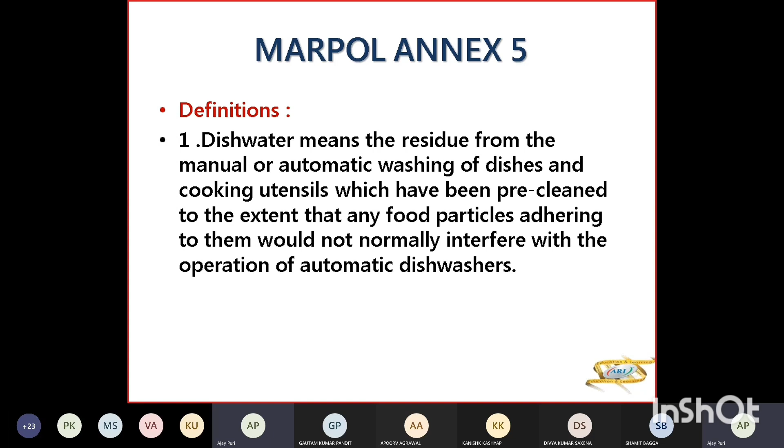Grey water. Grey water is basically drainage from dishwasher, shower, laundry, bath, wash basin. But toilet, urinal, hospital, animal spaces का black water है, which is sewage. So that is not considered in grey water. So grey water is not considered garbage in the context of Annex 5.

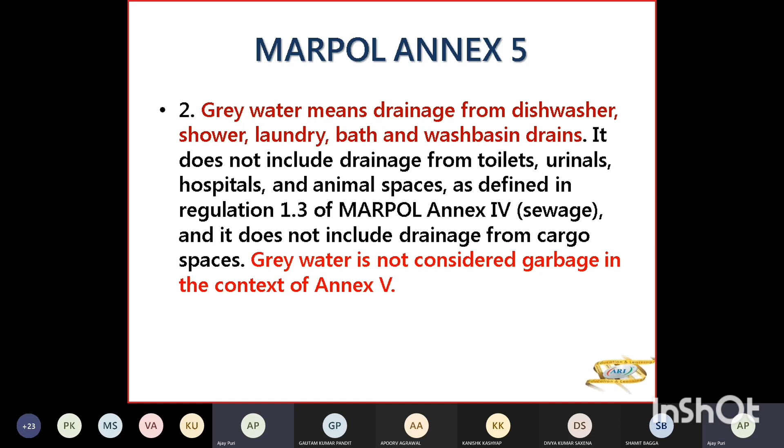Recycling means activity of segregating and recovering components and material for reprocessing. Reuse means activity of recovering components and materials for further use without reprocessing.

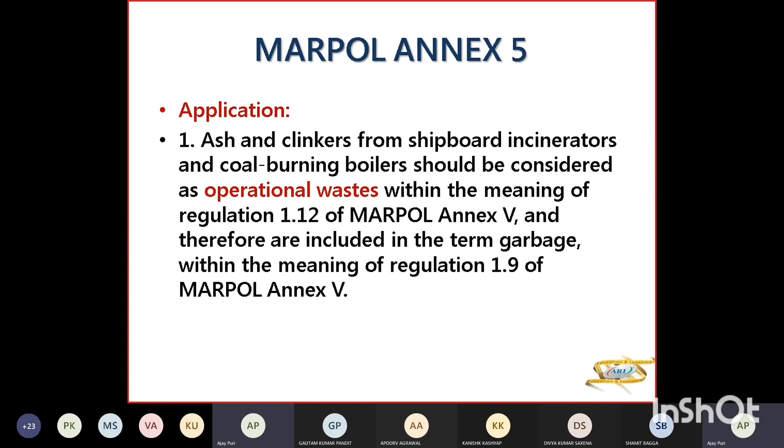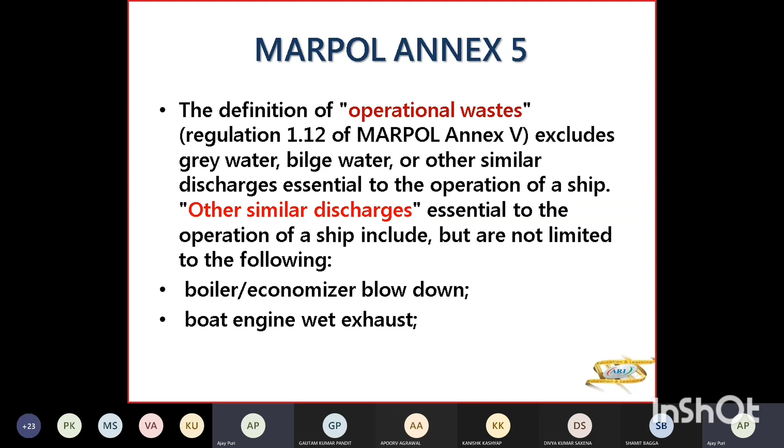Now, definition of operational waste will not include grey water, bilge water, or similar discharges. Other similar discharges जो definitions में आते हैं, they will be boiler, economizer blow down, boat engine wet exhaust, chain locker effluent, chain locker का जो discharge है, when you have controllable pitch propeller and thruster, so the hydraulic fluid and other oil to sea interfaces, that is also other similar discharges.

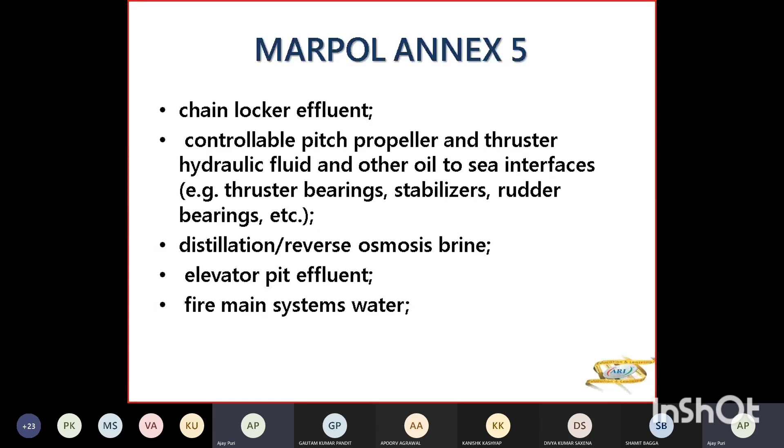Then your distillation, reverse osmosis brine. Brine is salt water. That is also considered as other similar discharges. Elevator pit effluent. जो elevators हैं जो आपके RoRo vessels में, तो उसके नीचे जो जगह है उसमें जो पानी इकट्ठा हो गया, so that is effluent. Fire main systems water. That is other similar discharges.

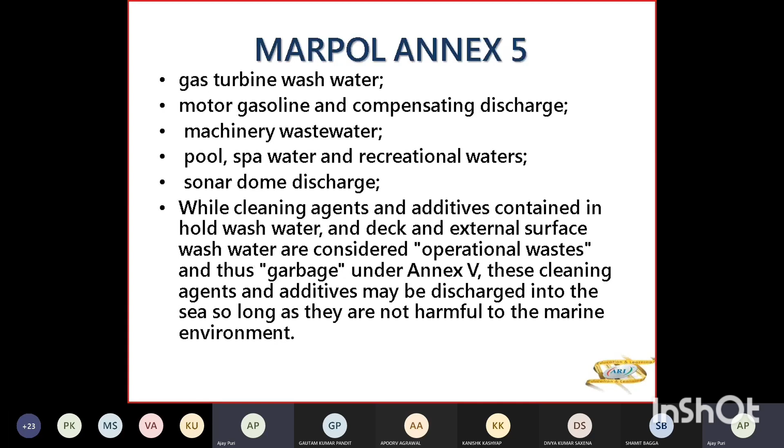Now, Port State Control is going to come on board for checking if you are complying with your MARPOL, ISM, ISPS, MSC, with your SOLAS, STCW, MLC. All these requirements will be checked. उसको check करेगी आपकी Port State Control. So every MARPOL regulation will be checked by the PSC. You have to adhere to it.

So here, Port State Control officers can inspect a foreign flag ship at the port or offshore terminal where there is a clear ground. Clear ground का मतलब है when you are not complying with your code, so they have a clear ground for detailed inspection. For example,

Port State Control का इंस्पेक्टर जहाज पे आया और he is taking a round. Now on the round he has seen that fire control plan box लिखा हुआ है. Now he opens the box of the fire control plan और उसमें plan ही नहीं है. So he'll give you clear grounds for detailed inspection, then they'll inspect all the other things and hold the ship till you are correcting.

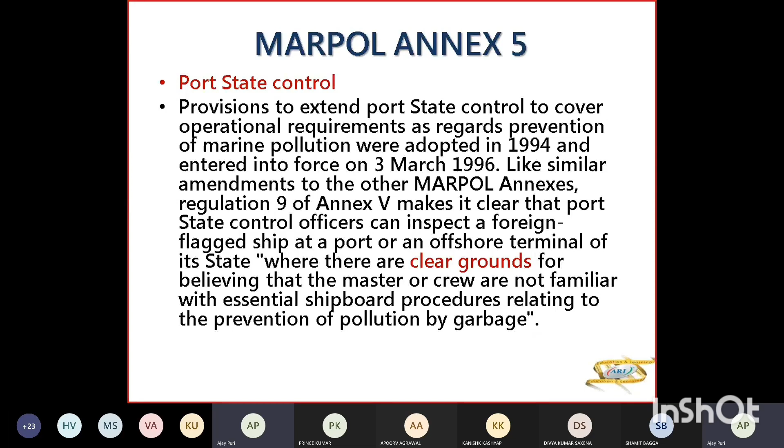Placard. So they require a placard for every ship of 12 meters and over in length, and fixed or floating platforms. They are supposed to display placards notifying your passengers कि यहाँ आप वेस्ट डाल सकते हैं, इस बिन में वो वाला डिस्चार्ज कर सकते हैं.

So that will be mentioned in the placard. So the placard should be written in working language of ship's crew and also in English, French and Spanish, so that your passengers can understand.

Now, garbage management plan, बहुत बार question आ चुका है, what is garbage management plan? So it is required for ships of 100 gross tonnage and above. Every ship certified to carry 15 persons or more, and for ships of 100 gross tonnage and above, and for every fixed and floating platform, they are supposed to

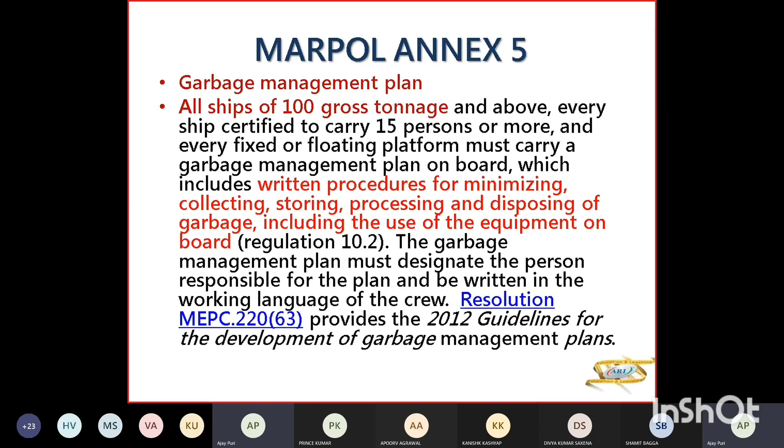have garbage management plan. So in your plan, you will have written procedures, how to minimize garbage on board, how to collect garbage, how to store garbage, how to process it, how to dispose garbage, including how to use the equipment for garbage collection. So इसमें एक designated person will be responsible for the garbage management plan and it should be written in working language of the crew. So MEPC resolution will provide the guidelines for development of garbage management plan.

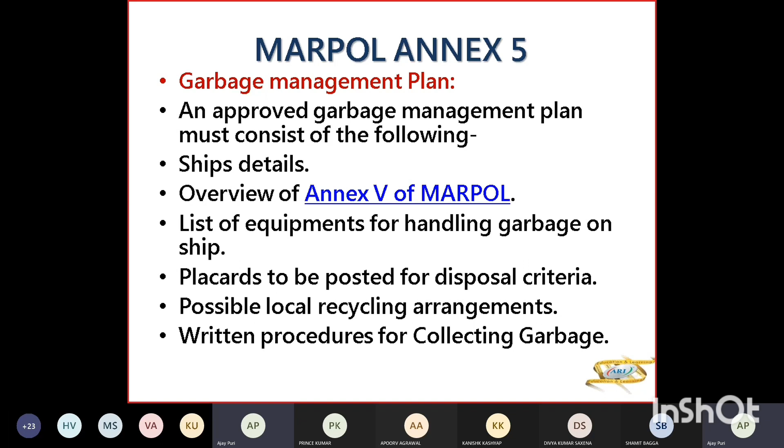So what will be a garbage management plan? It's approved, that is, a flag state approves the garbage management plan, जिसमें ship के detail आएंगे. Overview of Annex 5, so the discharge criteria of Annex 5 will come. List of equipment for handling garbage on ship, which are the placards to be posted for disposal criteria. What kind of possible local recycling arrangements are there on board? What are the written procedures for collecting garbage? How do you segregate garbage?

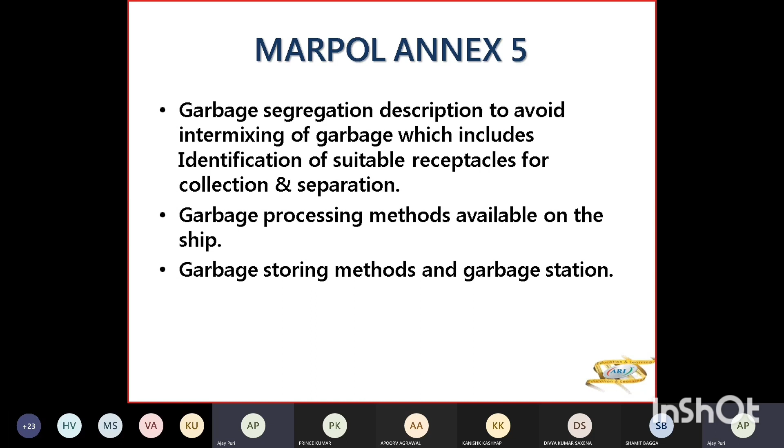What are the processing methods available on board? What are the storing methods there? Where is the garbage station? All will be given in your garbage management plan. What are the disposal methods there? What will be the entry made in garbage record book? What are the emergency and accidental discharge criteria? What are the needs for reception facility? Identify the available operating and maintenance procedures for collection equipments on board.

What is the training and educational program so that you know how to segregate garbage, how to process garbage, how to make entry in the garbage record book. Then you locate your garbage collection points, कि किस डेक में कौन सा पॉइंट है.

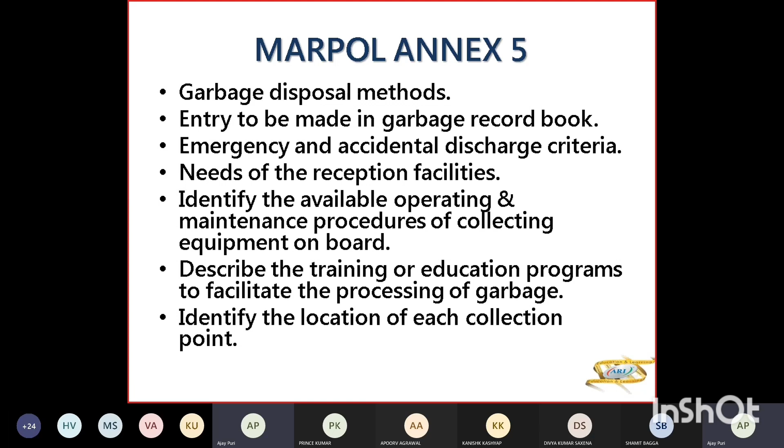So garbage management plan mandatory है for ships of 100 gross tonnage and above, and on ships which are certified to carry 15 persons. Suppose छोटा जहाज है और इसमें 15 से ज़्यादा लोग हैं, then also you'll require GMP. So it is written in the working language of crew, and this has to be retained on board as record for 2 years from the date of last entry. So a responsible officer should be in charge of maintaining garbage management plan. Normally chief officer is responsible along with second engineer.

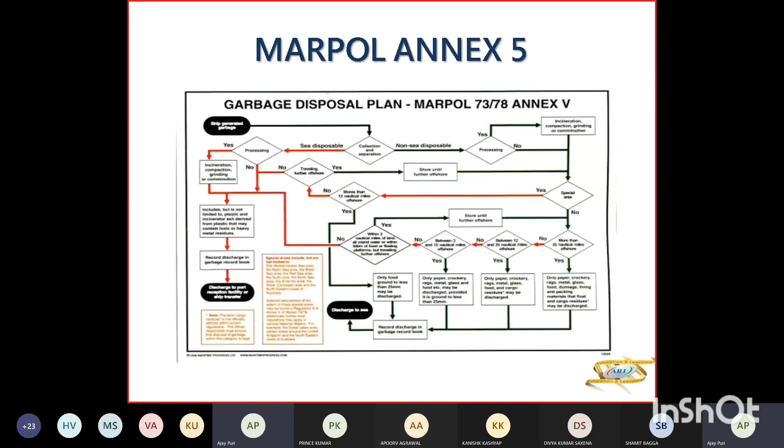So यहाँ disposal plan है, चलो ये वाला करते हैं. Now this is your ship. ये garbage management plan में ये flow chart बनाना पड़ेगा. So this is ship generated garbage. You are collecting and separating it. This is sea disposable garbage which you can dispose of as per your discharge criteria. And this is non-disposal, जिसको shore को देना. So sea disposable garbage को process करना है कि नहीं करना? No processing. अगर वो food product है तो you have to pass it through grinder and comminutor. And then you are authorized to discharge at sea or not.

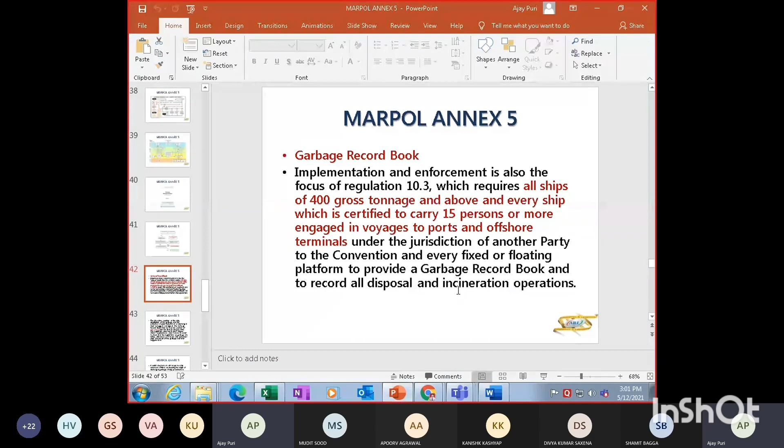So here you have to, आपका garbage management plan was 100 के ऊपर, 100 gross tonnage and above, but garbage record book is 400 gross tonnage and above, and every ship certified to carry 15 persons or more in voyages to port and offshore terminals. GMP was also for 15 persons and more.

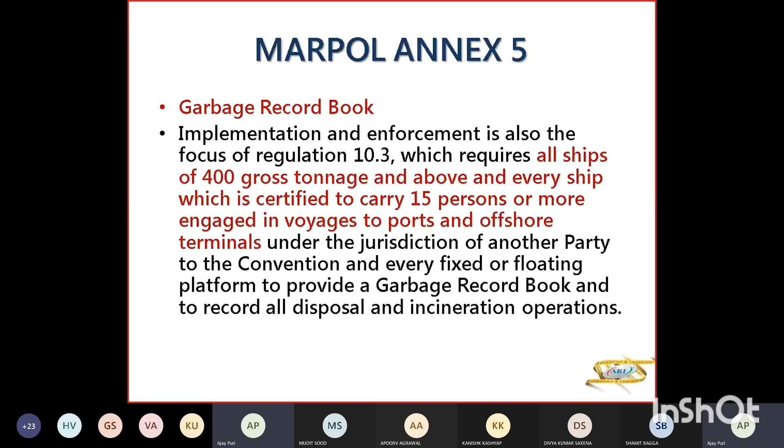So the date, time, position of the ship, description of garbage and estimated amount incinerated or discharged must be logged and signed. The garbage record book must be kept for a period of 2 years after the date of last entry. So it should be kept for 2 years after the date of last entry.

And this regulation does not itself impose stricter requirements, but it makes it easier to check the regulations on garbage are being adhered to, as it means ship's personnel must keep track of the garbage and वो कहाँ गया है. Because PSC आपको पूछ सकता है कि कहाँ garbage गया और आपने रिकॉर्ड नहीं किया, then he can give clear grounds and detailed inspection हो जाएगा.

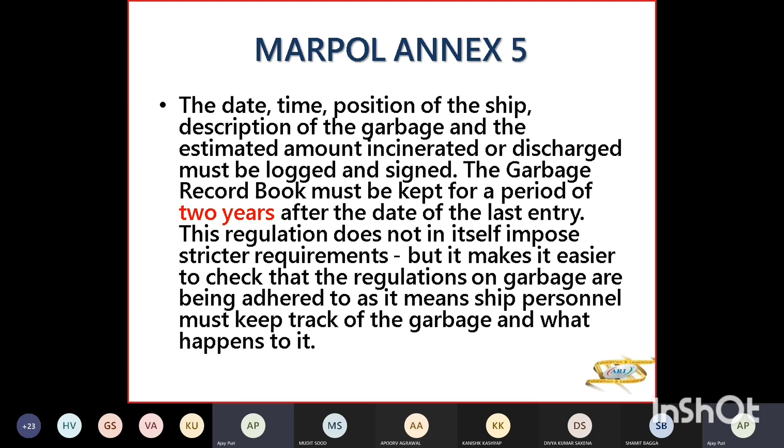So it can also prove an advantage to the ship because your local officials are checking the origin of discharged garbage. And when you made your record, then you have a proof. Otherwise, you will be wrongly penalized for it.

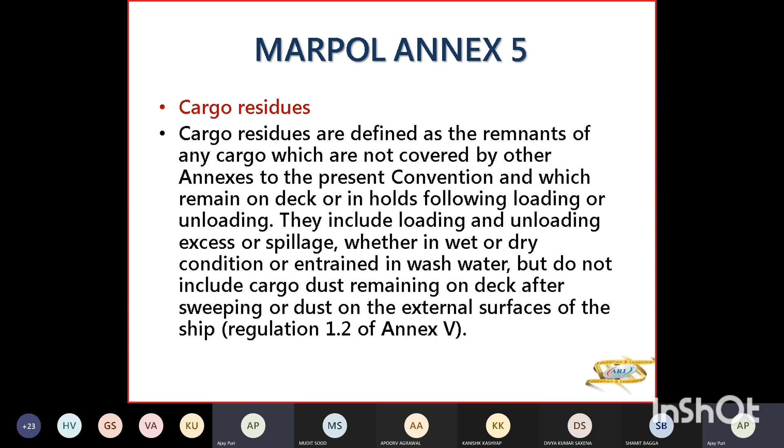So cargo residues will be classified as HME or harmful to marine environment, which must not be discharged to sea. So they have to be given to the shore reception facility. So the Annex establishes different requirements depending on whether they are contained in wash water or not. So solid bulk cargoes must be classified and declared by the shipper as to whether or not they are harmful to the marine environment, and the criteria as per Appendix 1 of MARPOL Annex 5.

अब आता है शिप बोर्ड में जो जलाने के लिए इंसिनरेटर है, that will cover the design, manufacture, performance, operation, testing of this when you want to burn the garbage and shipboard waste.

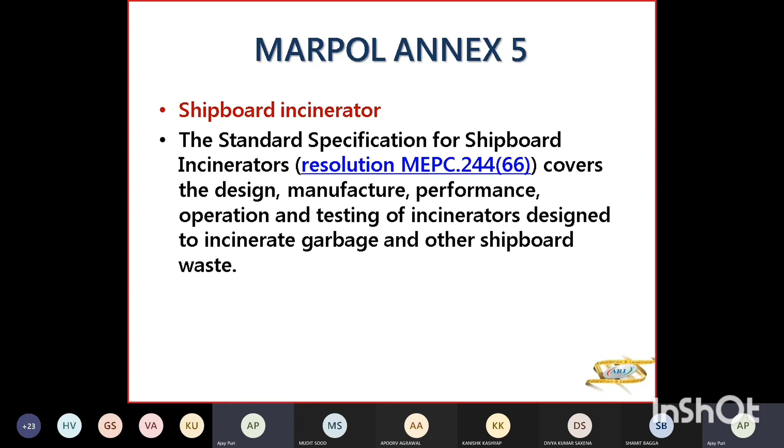And then you have chapter 2 of MARPOL Annex 5 where you have verification of compliance. So in the verification of compliance, your IMO member states will audit your ship and see whether you are going as per the requirements of Annex 5. So mandatory IMSAS, that is IMO member state audit scheme में, IMO members will appoint some of the IMO country guys to inspect your ship when you are in that country.

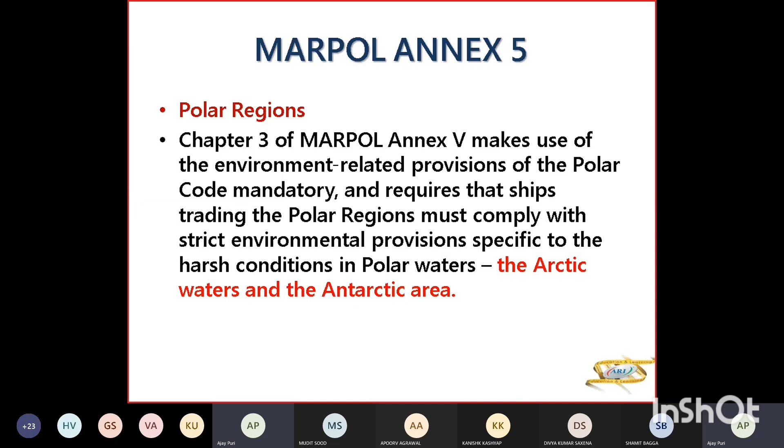Now in the polar regions, they have to comply with strict environmental provisions for harsh conditions of polar waters, that is Arctic and Antarctic. So you will have the requirements where you cannot dump waste.

तो अभी आपको जरा ये दिखा के then I'll show you a video. Garbage management plan देखें, and then we'll do. I'll show you a video.

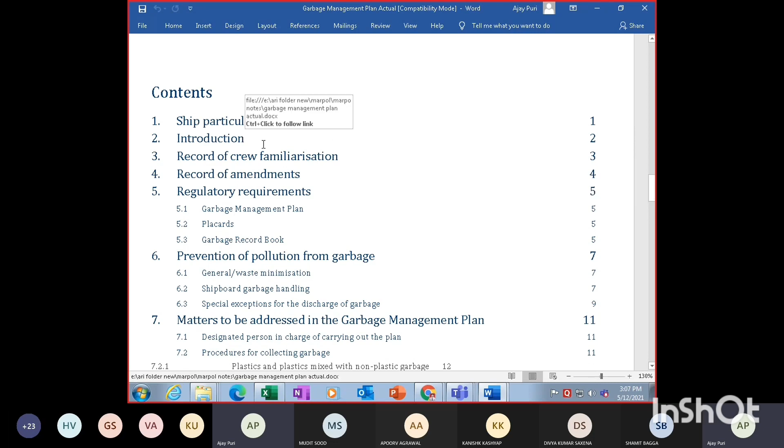Now you have the ship's particulars, the introduction, these contents of the garbage management plan. Many times they ask what are the contents of the garbage management plan. So in it: ship's particulars, introduction, record of crew familiarization with the procedures, record of amendments, regulatory requirements, which is your garbage management plan, placards and garbage record books, prevention of pollution from garbage, which is minimization of waste generation.

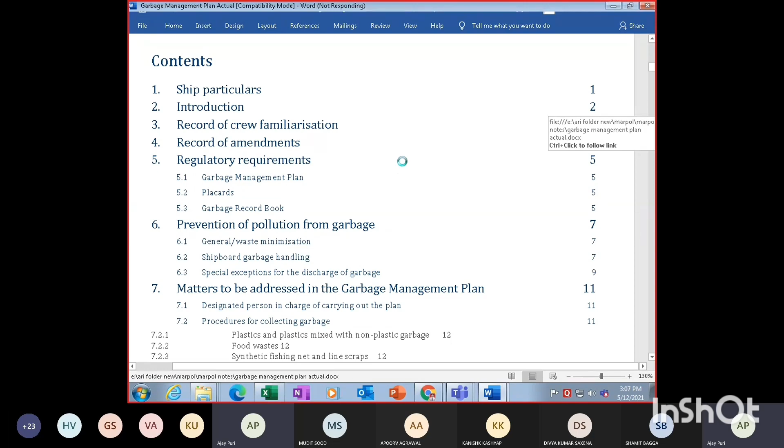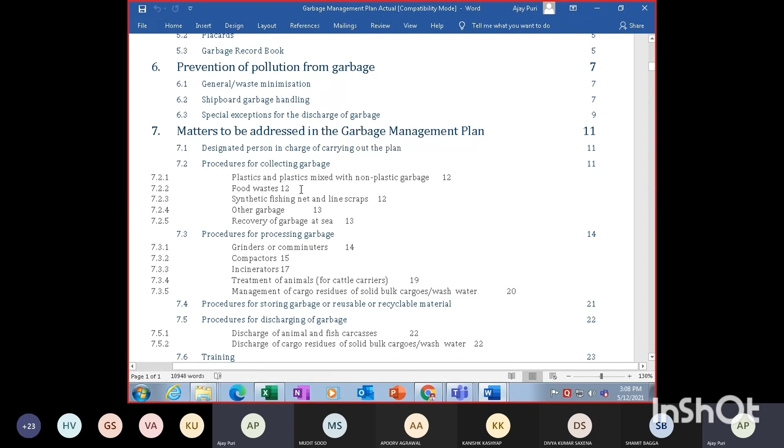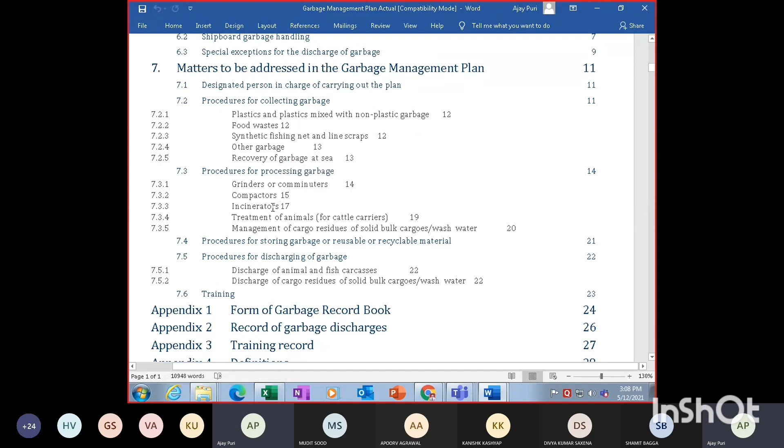Then your shipboard garbage handling, exceptions for discharge of garbage. Then matters addressed in the GMP will be who's the designated person, what are the procedures for collection of garbage, which will include plastic and plastic mixed with non-plastic garbage, food waste, synthetic fishing net, line scraps, other garbage, recovery of garbage at sea. How do you process your garbage? Grinders or compactors or incinerators.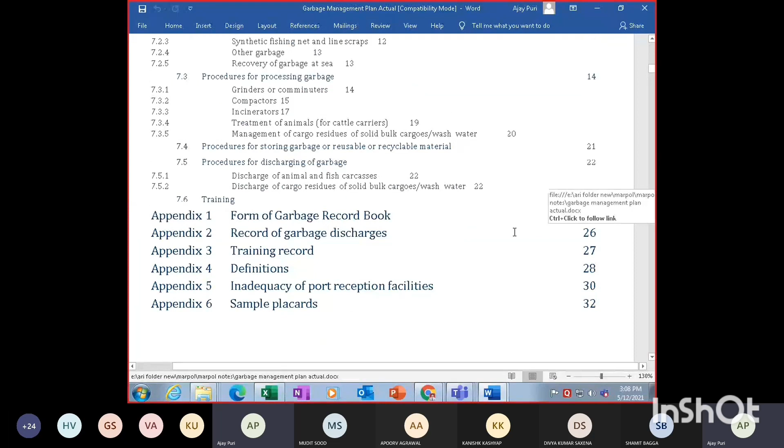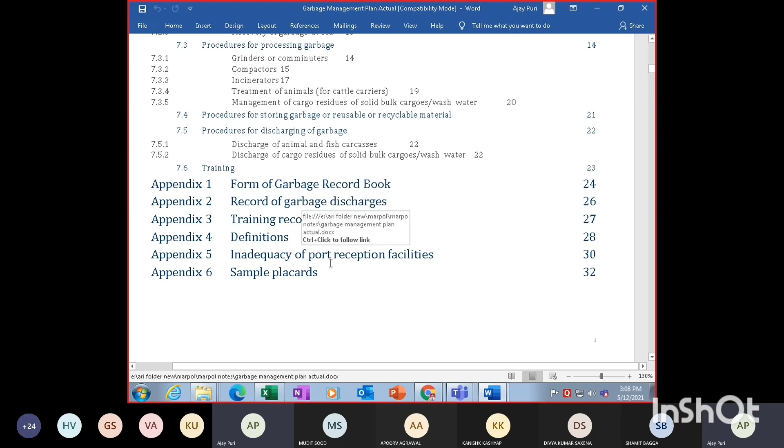And then treatment of animals in cattle carriers, management of cargo residues of solid bulk cargoes, wash water, procedures for storing garbage and reusable or recyclable material, procedures for discharge of garbage, discharge of animal and fish carcasses, discharge of cargo residues and solid bulk cargoes. And then the appendix; the training also will be there. Form of garbage record book, record of garbage discharges, training record, definitions, inadequacy of port reception, and sample placards. So this all will be there in your garbage management plan.

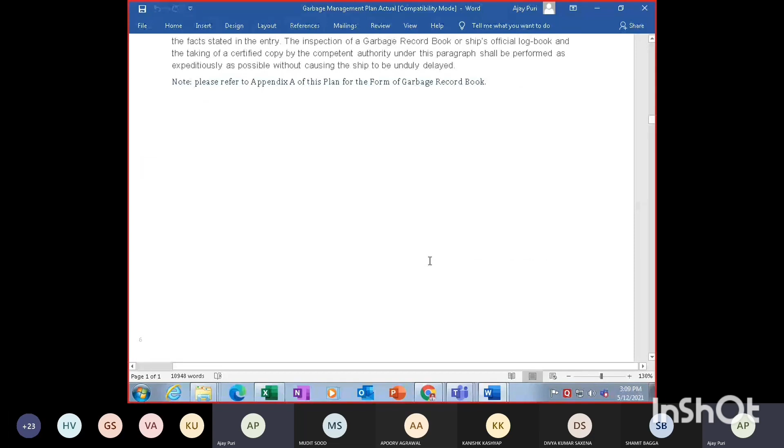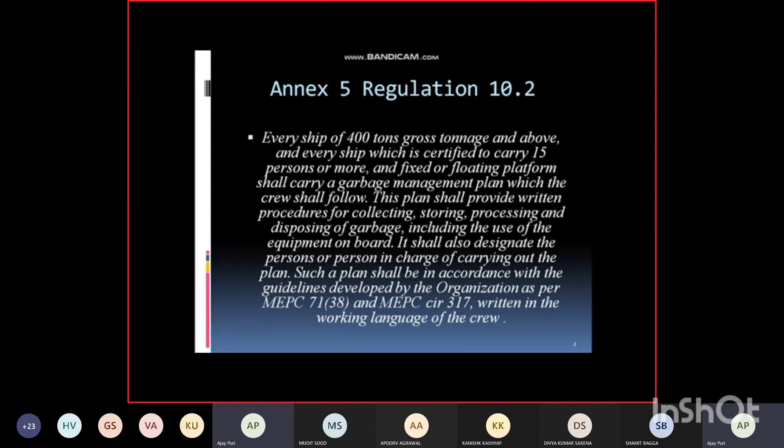Garbage management plan is my second video on MARPOL Annex 5. The first was garbage record book. Annex 5, Regulation 10.2, the full regulation of MARPOL is quoted word by word. Please look into the last sentence. They say that the garbage management plan has to be developed as per MEPC 71/38, MEPC Circular 317, and it has to be written in the working language of the crew.

The general index of the plan is just given as an example or sample. These are what the titles of the topics are going to be. This will change depending on type of ship, the run of the ship, the company procedures and the audit requirements, also as per any changes coming up with MARPOL. In the title page, the record of revision has to be there. The title page should have the company logo, name, and the name of the ship. Then it has to highlight if the ship is sailing in the polar region or not, if she carries bulk cargo, from which date the plan is effective, any revisions as per the page, date, and remark, if this is required for audit purposes.

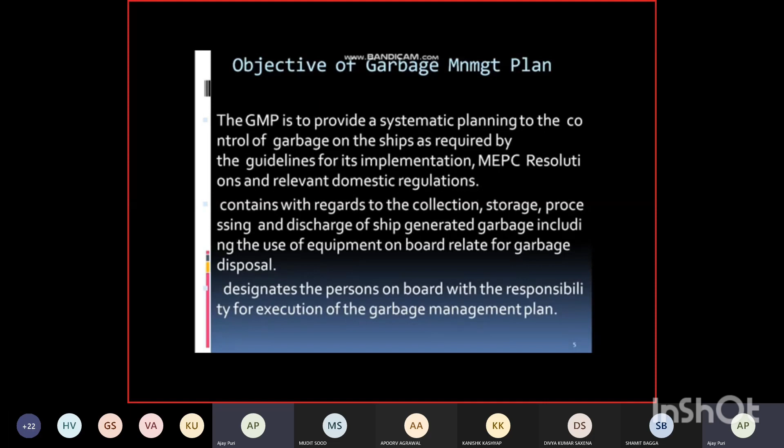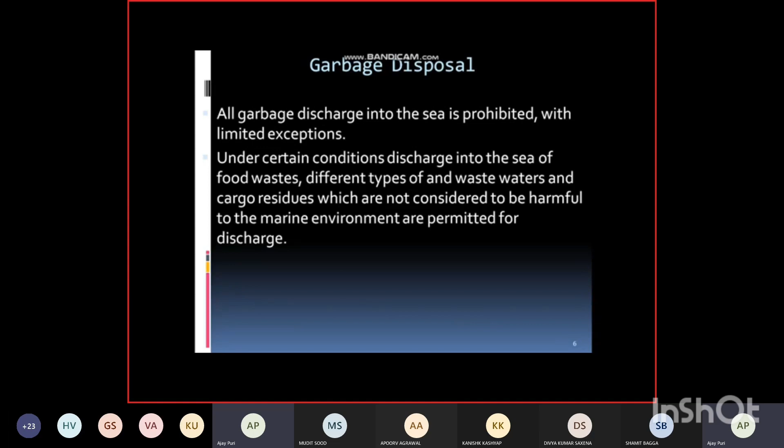The objective of the garbage management plan is systematic planning to control the garbage, the guidelines for the implementation, also the collection, storage, processing, and discharge of generated garbage. Then the designated person on board with the responsibility for execution of the garbage management plan. All garbage is not to be thrown in the sea, except garbage which is not considered harmful to the marine environment is permitted to be discharged. How it is to be discharged is mentioned. The exceptions are always there, especially for the safety of the ship, accidental loss of garbage, and third, in case retaining the food can create an imminent health risk, so we need to discharge that, especially when the vessel is near the coast at anchorage.

Treatment is carried out. Let us go into the detail of the treatment. All plastic items, including material plastic, either have to be landed ashore or incinerated. In case you have an incinerator, it should very clearly mention whether it can incinerate plastics. If a non-IAPP approved incinerator is there, then you have to check whether all plastics can be incinerated. Food waste can go through the comminutor and then go overboard, or has to go after 12 miles. In special areas, even if passing through the comminutor, it has to be 12 nautical miles from the nearest land.

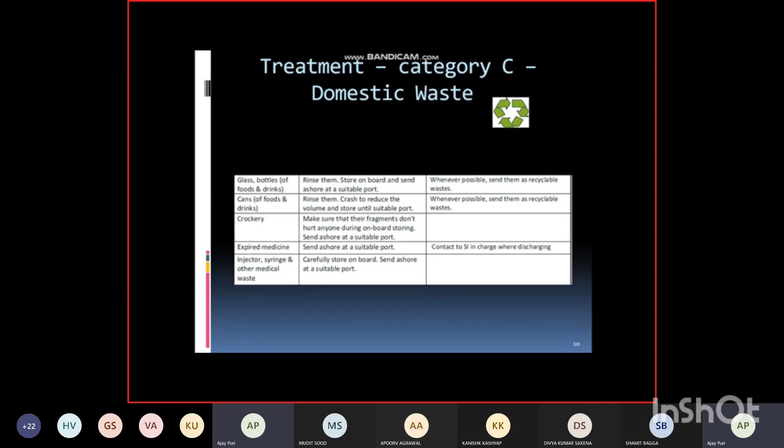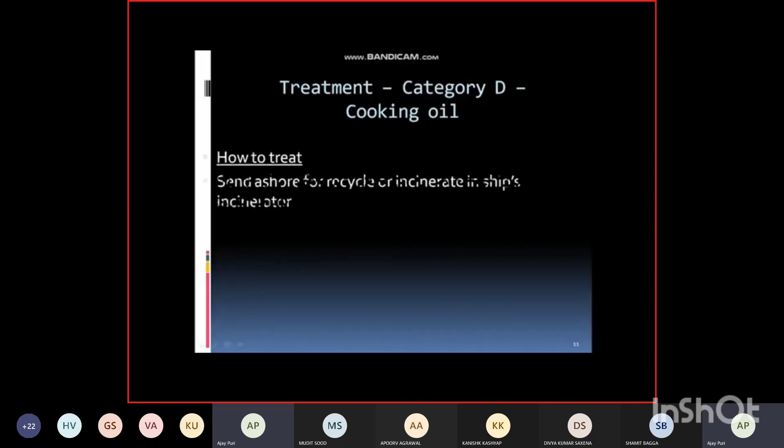A person operating the comminutor has to be careful that the ship is not rolling in rough seas, and he has to be careful regarding safety. Category C is domestic waste: glass, paper and other materials which do not contain chemicals come under domestic waste, and it is clearly mentioned they have to be recycled. The recycle sign is also shown, which means they have to be sent ashore for recycling. Cooking oil has to be either sent ashore or incinerated. If incinerating, it has to be soaked in oily rags and then burned.

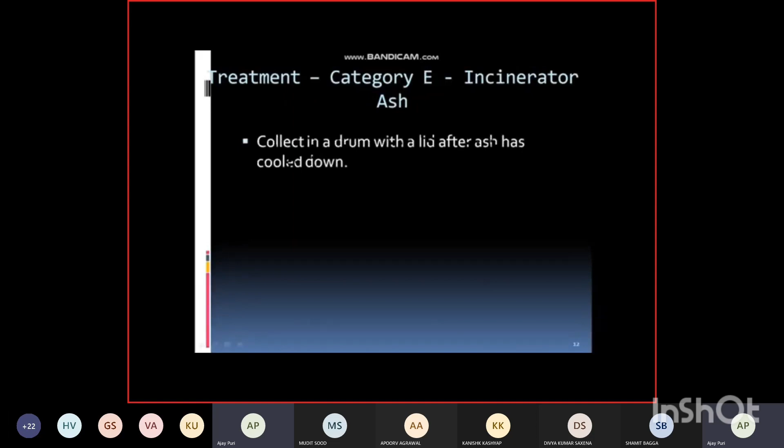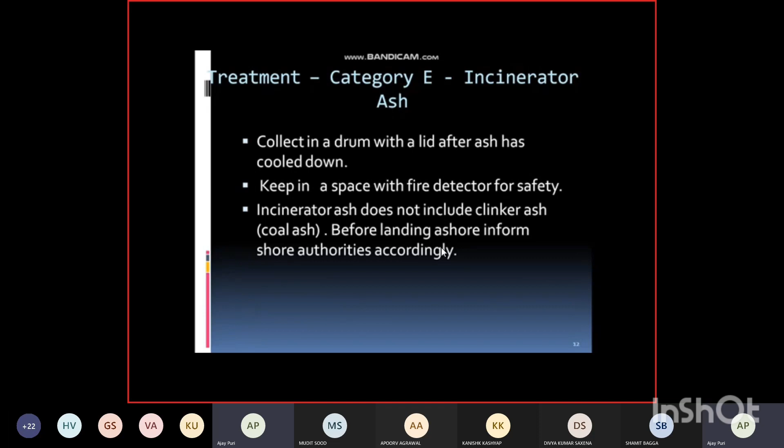Category E is incinerator ash. After incineration, it has to be put in a container with a lid, kept in a place which has a fire detector. Next is clinker ash, that is coal ash, which is not to be mixed with other ash being burnt, and it has to be landed ashore separately. Category F.

This is operational waste. These are different. The operational waste contains some sort of chemicals, paints, lubes, which are harmful to the sea. Even if they are empty, they have to be kept separately and landed ashore.

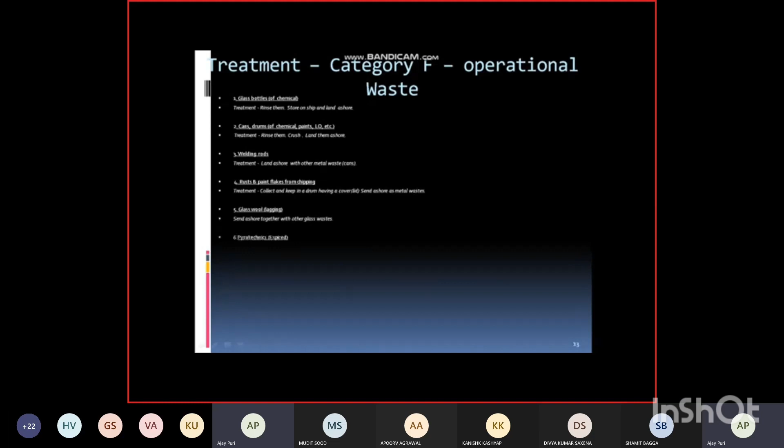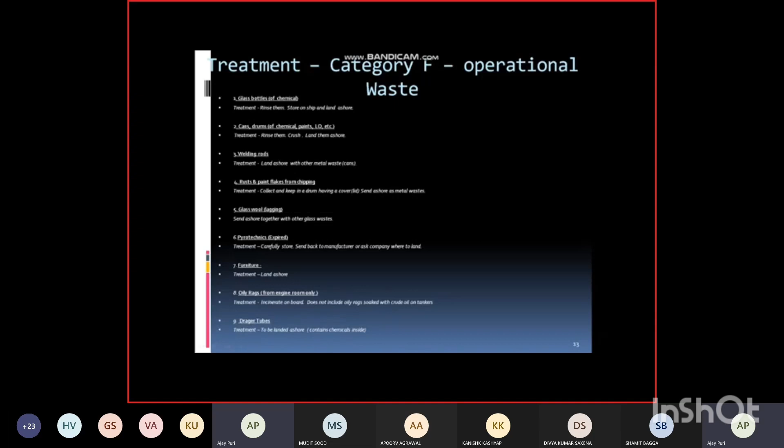For example, the glass bottles, the can drums for chemicals and paints, the welding rods, paint drums, glass wool, pyrotechnics, the furniture, oily rags, and Drager tubes. These are just examples. Also, please refer to the company manual.

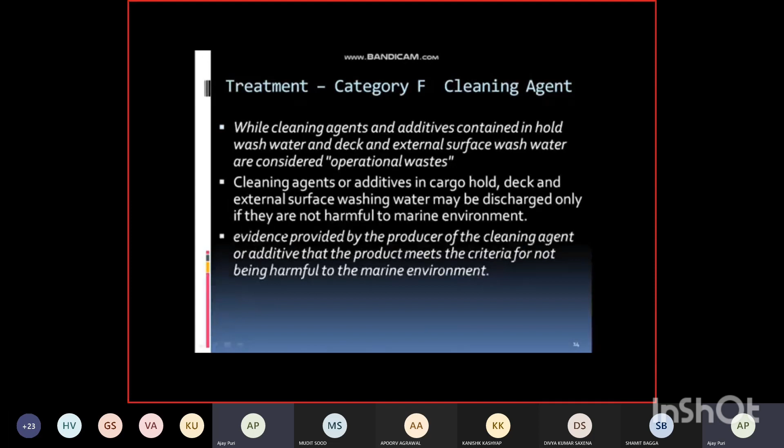The next comes the cleaning agent, which is coming again in category F, and it is part of the operational waste. It can be discharged, this cleaning agent which is there for cleaning the hold, the deck, the external surface. It can only be discharged when it is not harmful to the marine environment.

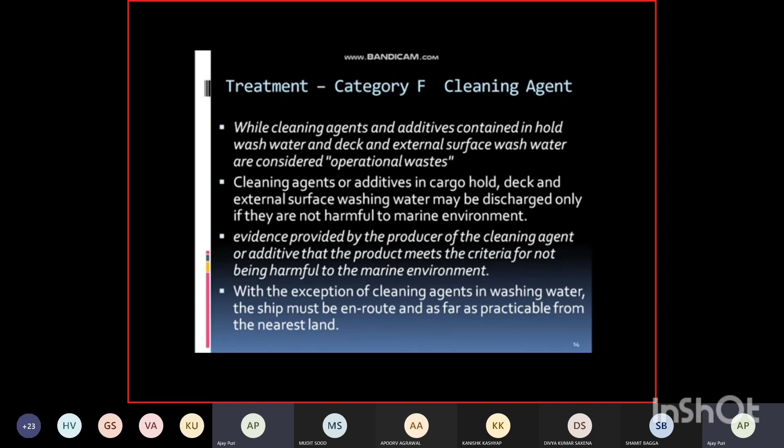And then the producer or the agent has to supply a certificate stating that this is not harmful to the marine environment. The record of this document or statement has to be preserved and kept for the next 2 years for audit purposes. This cleaning has to be done while the vessel is en route and as far as practicable from the nearest land.

Exemptions with the water is the grey water, the bilge water, the water from the chain locker, fire main system water, freshwater layup, machinery waste water, pool, recreation water, and any other similar discharges essential to the operation of the ship. They can be pumped overboard.

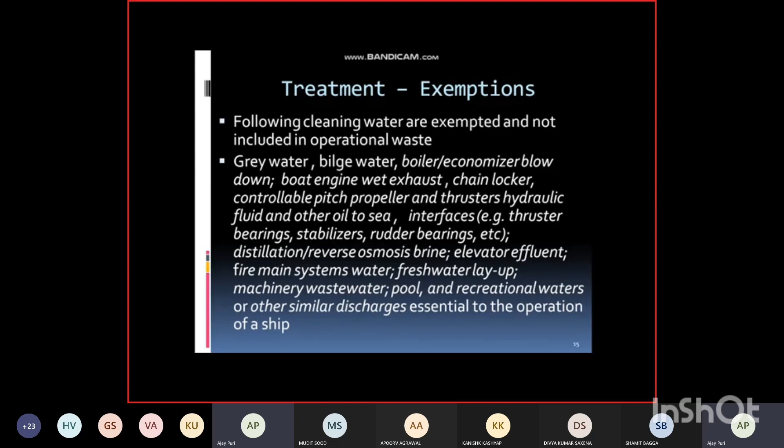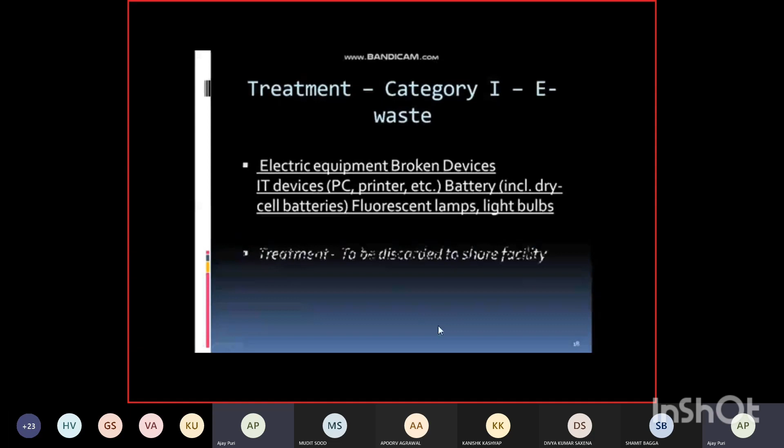Category I is e-waste: electrical equipment, broken devices, printers, batteries, fluorescent lamps, light bulbs. This has to be sent only to shore and they have to be stored properly.

How does the chief cook know that we are not in special areas? It is normally marked on the chart, and he has to ring up the bridge to check whether we are in the special area or not. It is the duty of the navigator to inform him that we are in special areas, so as not to throw the food overboard.

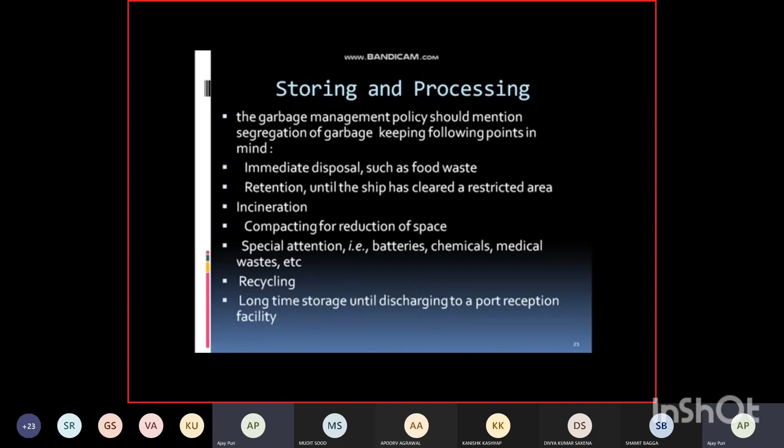Such placards are mostly on all ships, and they give detail over storing and processing. The garbage management policy will inform how you are going to do the disposal of such food waste, retention till the ship has cleared a restricted area, compacting for reduction of space especially for plastic, special attention for chemical and medical waste, and how recycling items have to be landed.

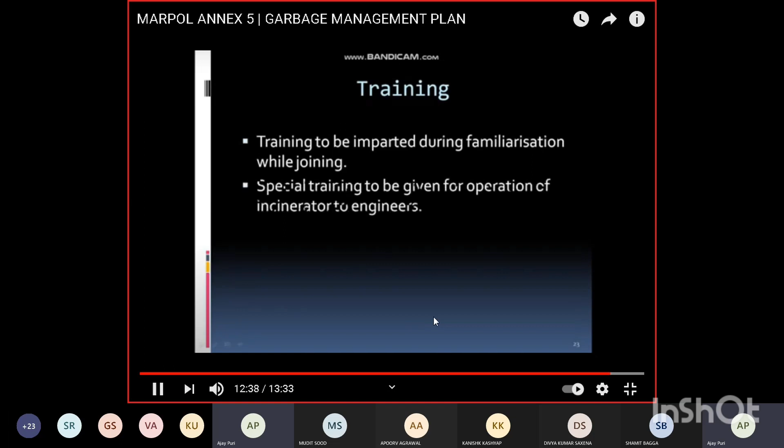Last but not least, and very important, is the training. Every seafarer gets training regarding garbage before joining. Once he comes on the ship, he has a complete look and gets completely familiarized with his duties regarding the garbage.

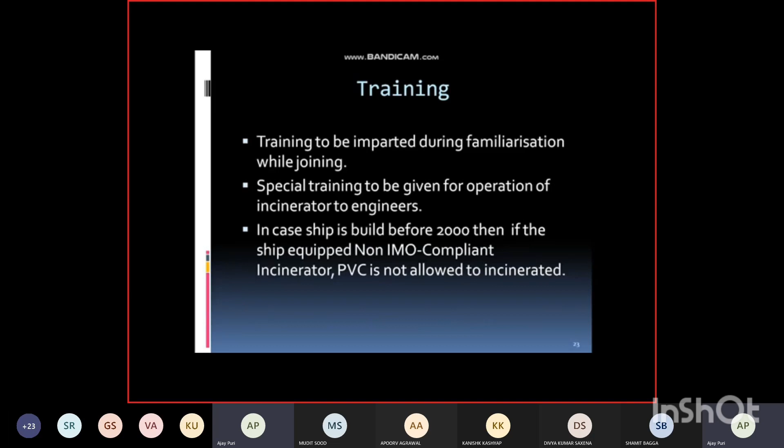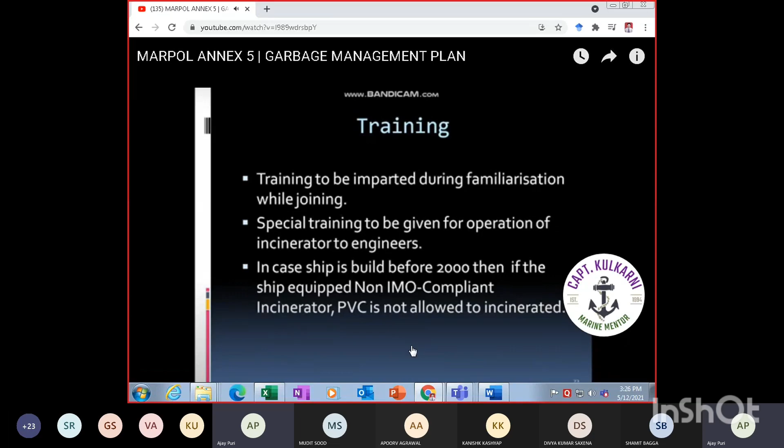Especially for the operation of the incinerator, the engineers need to be given training. In case the incinerator is non-IMO compliant, then the engineer has to be informed that certain plastics cannot be burned. The chief cook has to be given training for his equipment, and training is equally important.